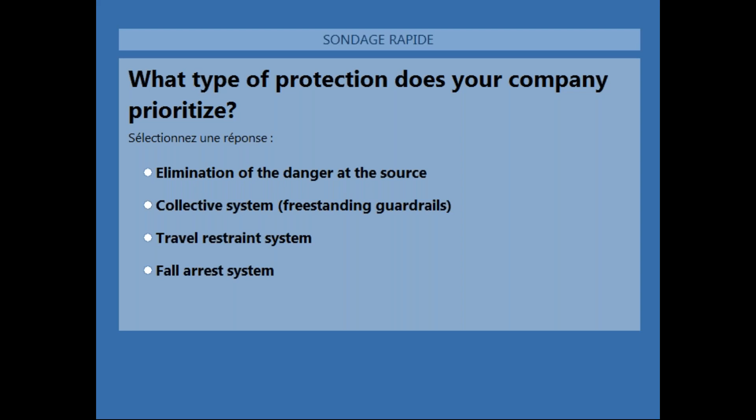Okay. So I think, yeah, a couple more seconds. Don't be shy. We just want to know who we're talking to. Like, what's your reality? What are you guys dealing with on a daily basis? I think maybe here, if I can add something before. Well, I was gonna ask something while they were answering.

I know a lot of people are gonna say we prioritize the elimination of danger at the source. Yeah, I was seeing the results on our screen, that's why I was gonna add this comment. But like I said, sometimes it's not always possible. I know that everybody's going to try to eliminate the risk at the source, but is that the reality of their enterprise? Were they able to eliminate all the dangers at the source? Is that the wish or the actual situation?

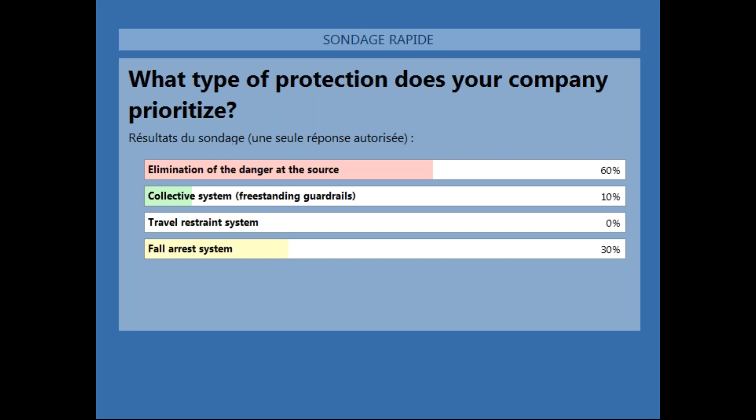Well, you can see on your screen that a third of you guys are prioritizing fall arrest systems, while a few percent are prioritizing collective systems and travel restraint systems, and as we just mentioned, the majority of you are trying to eliminate the danger at the source. Dominic, what are your thoughts? Well, I'm surprised and kind of happy that the first step is trying to remove the danger at the source.

I am noticing, however, that there's three times as many people doing fall arrest as collective systems. So I'm thinking maybe a lot of people don't know all the ins and outs and extra costs associated with fall arrest, as Francis mentioned. And maybe today we're trying to up that 10% a bit more on the collective system. Not that many people use it, so it's often a matter of not knowing how the system works.

And people have asked us to go deeper into working at heights. So that's why we created this webinar today. So that's perfect. All right. So I guess we can go back to your slide, Francis. Yeah, well, I was actually finished with that slide.

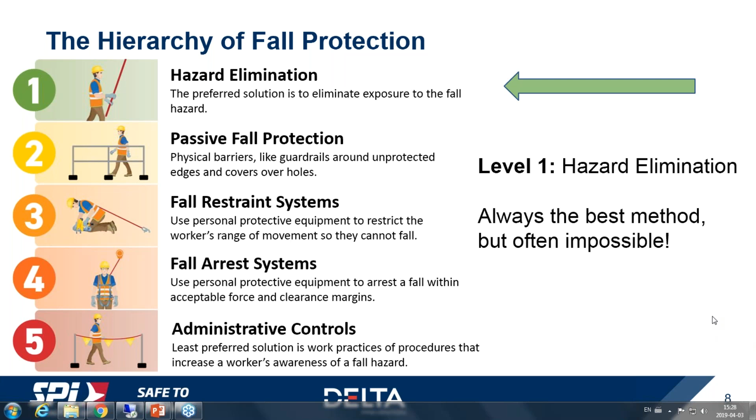Okay. So like I said, the first level, hazard elimination, should always be the first step. You should always look into trying to eliminate the danger at the source. But it's not always possible. So when that's not possible, you go to level two, which is the passive fall protection systems, the guardrail system. So when one is impossible, we should always consider two to see if it's possible. A lot of people think that number two is expensive, but when we take into consideration the long-term costs of number three and number four, sometimes they come up to be more expensive than number two.

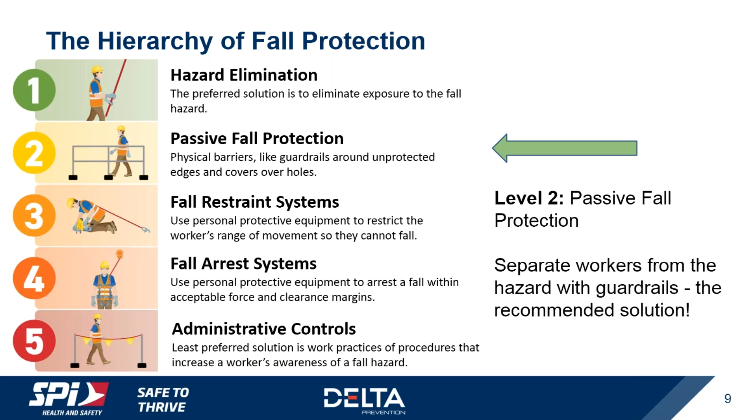Yep. We're going to ask you another question. For the 30% of people who've answered that they use travel restraint or fall arrest systems, in that case more fall arrest systems, what is your main concern? Is it your employee training or your personal training as well? Is it the engineering plan in terms of a permanent system? Is it the maintenance and compliance of your systems, or you do not use this system?

So we'll give you a few seconds again to answer. You may choose more than one answer this time, so maybe A and C, for your reality or your concern. So give you a few more seconds. Don't be shy. We want to know what are your concerns. The objective is always to answer your questions today and to make sure that when you finish this webinar, you go back to your work or your home and you say, okay, I understand now what my concerns are and how I can tackle these concerns.

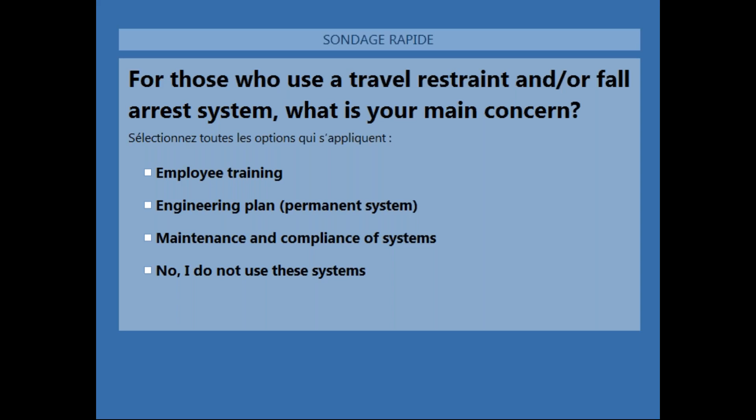Well, I'm happy to see these results because it tells us that people know that they need to train their employees to use a fall protection system. So that's a good thing. Where it's not a good thing is that they're concerned about the training of their employees, or themselves actually. They may feel they are lacking qualified training.

Okay, and the 64% for maintenance and compliance of systems, that's good too, because they know that an anchor point needs to be certified every year, and the equipment too, or the anchor point needs to be certified following the explanations of the engineer and the engineer plan of the anchor point. But usually it's around every year or every 2 or 3 years that it needs to be certified. So I'm pretty happy with these results.

Yeah, I think also the harnesses. A lot of people need training. It needs to be double checked. So I'm happy to see that's a concern because we actually want to address this later on with the freestanding guardrails and how it's meant to easily attain those compliances, those standards.

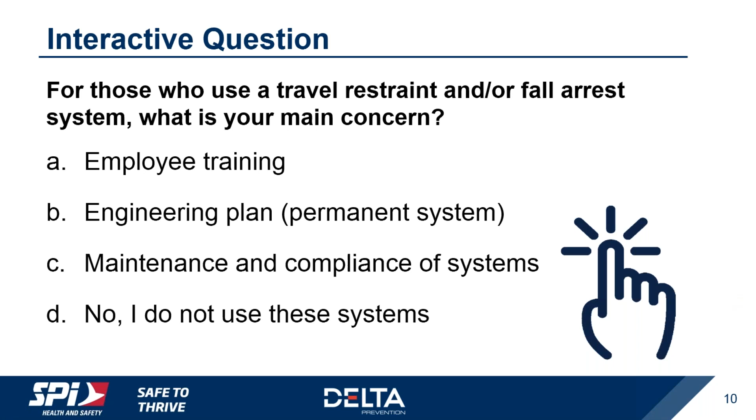Yeah, and if you don't know, one part of SPI's mandate is to offer training, but also expertise like auditing what your practices are and seeing where you may need a rescue plan or different assistance for different risks. So part of the training as well. Francis, you were a trainer advisor before. Yeah, exactly. I did audits in some enterprises that didn't know where to tie off when they were doing work at heights. They didn't know what kind of anchor point to use. They needed help with the training of their employees, so that's where SPI can help in all those fields. Good. All right, thanks for answering that question.

Now let's talk about the recommended solution. Yeah, so the recommended solution is, like we said, when we can't eliminate the danger at the source, we need to look into guardrails. And why guardrails? Well, first off, it's a collective system versus an individual protection. Using guardrails enables us to work on, let's say, a rooftop with many different workers. It's not only one person at a time that can use a guardrail. It's as many workers as you want that can use the same protection.

That's a positive point. There's no management of PPEs, so we don't need harnesses, we don't need lanyards, we don't need SRLs to work with guardrails. Like I said, it's a passive system, it's a collective system, so we don't need those types of equipment. There's no need for a prevention plan with guardrails, and it eliminates the risk of falling. It isolates the risk of falling. So these are all the positive points of guardrails. Very positive points, I would say.

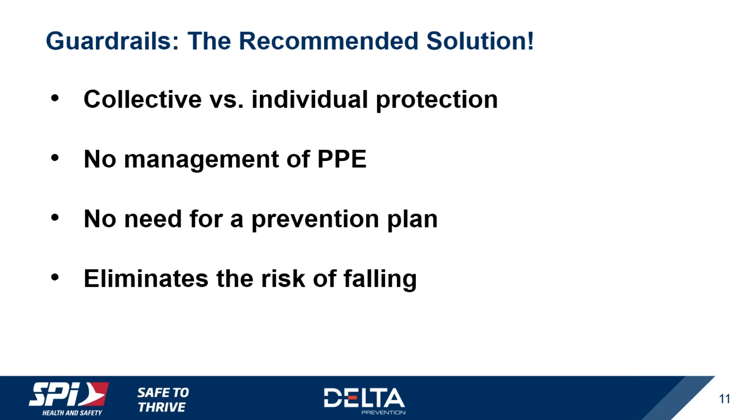And some points about the, how can I say that, the standards of the construction of the guardrail. Well, the upper railing needs to be between 900 and 1100 millimeters, so 42 inches. The middle railing just needs to be halfway, depending on the height of the upper railing, and it must be able to withstand a force of 1 kilonewton.

So if you're not used to working with kilonewtons, I'm not, it's 225 pounds, roughly. Okay, so these are the characteristics of guardrails. Something I might add, these apply to both freestanding, like Delta does, or any fixed system. So it's the same standard used by the National Building Code.

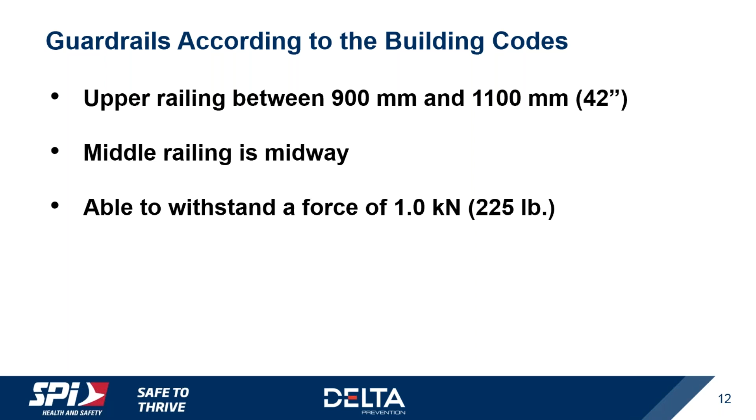We could have put, like, I drive a Subaru Outback. You drive a Porsche, I saw you, eh? No, a Mazda 3, Francis. Oh, a Mazda 3. I thought it was a Porsche.

Oh, but before, like I said, I'm full of surprises, Francis. We have another question for you. Before we get into the guardrails, we want to know what is the most important criteria for you when choosing a guardrail system? Would it be A, it has to meet the standards, B, it has to be easy to install, C, the durability of the system, or D, the aesthetic? So we'll give you a few seconds.

Oh, you guys are less shy. You've already jumped on answering the poll question. That's awesome. So we'll give you a few more seconds. All right.

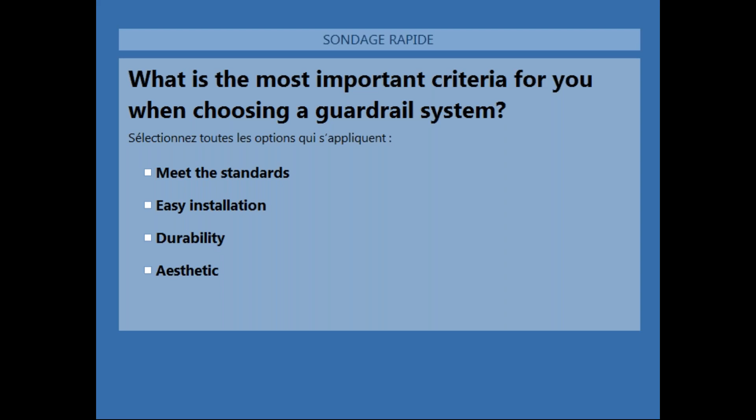Okay, perfect. So the results are on your screen. So what do we have here? 85% of you guys are concerned about meeting the standards. 46% are concerned about easy installation. 46% about the durability. Oh, nobody's concerned about the aesthetics.

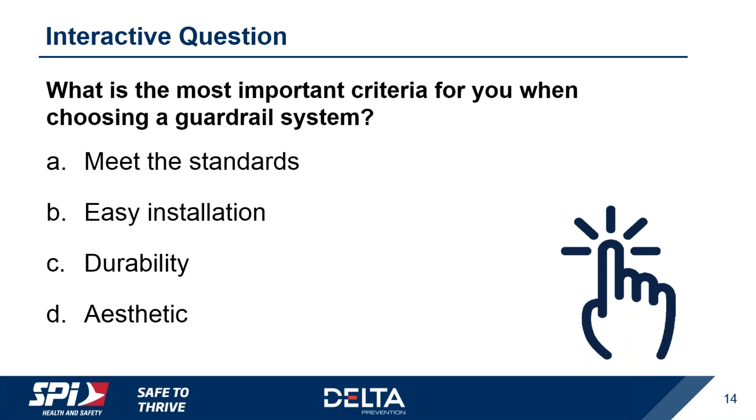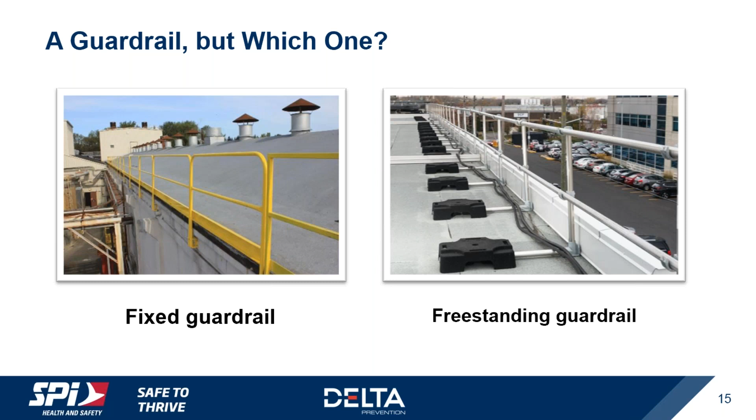And other positive points about the freestanding guardrail systems is that, well, first off, it's not anchored to the building, like I said. Fixed guardrails, yes, they are anchored to the building, so you need to drill holes in either the membrane or the structure of the building. For the fixed guardrails, you need an engineer plan. It's required. For the freestanding guardrail, no, but if ever it comes up as a question later on, Delta actually has an engineer plan that says that it responds to the specification of guardrail systems.

Fixed guardrails are not quick to install, whereas freestanding guardrails are, and fixed guardrails can't be moved or modified, whereas the Delta freestanding guardrail can be.

So if I'm modifying, for instance, my company's growing, I'm adding an extension to the building, I could definitely reuse what I already have and just complement. Yeah, it's easily adaptable, or you can add sections onto it. I mean, it's a pretty simple install and modification process for freestanding guardrails. Since it's not fixed, you don't need to unbolt it from the structure and then fill your holes and stuff. It's a non-issue for freestanding.

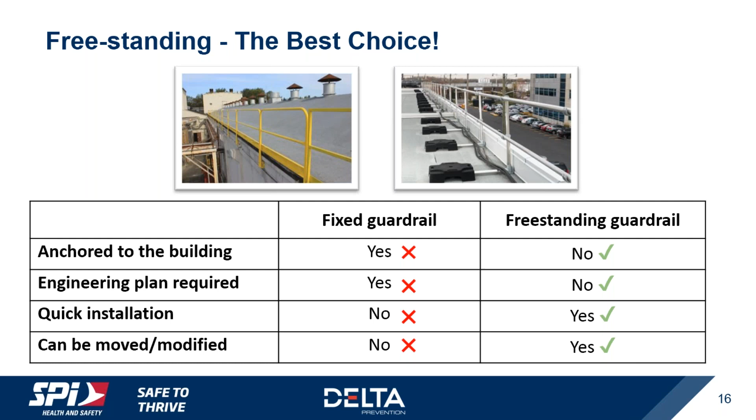And as you mentioned earlier, Francis, when you have a fixed guardrail, once it's done, you need to call the roofing company. They need to come too. Yeah, exactly. Let's say you're drilling a hole in your membrane, then you need to call a roofing company so roofers can come and fix the holes that you've just put in your roof so there's no leaks or anything.

Good. So we've talked about guardrails, but Delta, who are you guys? Who are we? We are actually a Canadian company. We are a manufacturer of permanent, non-penetrating rooftop fall protection solutions. I say permanent because it's not meant for construction. It's really meant to be permanent. It can work in that situation, but it's meant to be left on the rooftop.

You can see an example in the picture. It is those aluminum rails with those recycled rubber counterweights. That's our main system, often called ballasted systems also. So that's what we do. We manufacture this range of product. Throughout our range of product, we use unique materials. You have those black recycled rubber counterweights. They are 50 pounds each, while most of our competitors use steel, concrete, or cast iron.

What makes us different is our durability. Obviously, rubber will not crack like concrete. It will not rust, and it will not damage the membrane. It's easy to pick up and move, and easily dropped onto the rooftop. Let's say you physically drop it from a few inches or feet, it will not damage your membrane like concrete or steel would. So that's our main piece of the product.

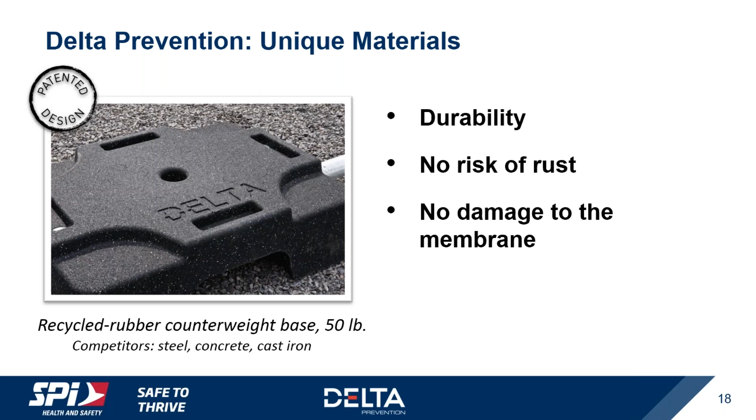The next big piece of our solution is the aluminum railing. Ours is anodized aluminum. Our competitors mostly use galvanized or painted steel. The advantage of using aluminum is it's lower weight, so it's way easier to install and move about for the employees, making a quick and easy installation, like Francis mentioned. It adds less weight to the rooftop because you do add weight for the counterweights, but whatever else you can keep light, that's just easier.

And being anodized aluminum, there is no risk of rust or discoloration, so it stays nice. People don't often mention the aesthetics. Good to know. It'll remain looking the same for years and years. That's good, yeah. And less weight on the rooftop matters with the winter we're barely getting out of, with the snow on the tops. We've seen several companies or buildings falling down. Every year we hear more about the weight on the rooftop. We need to consider it.

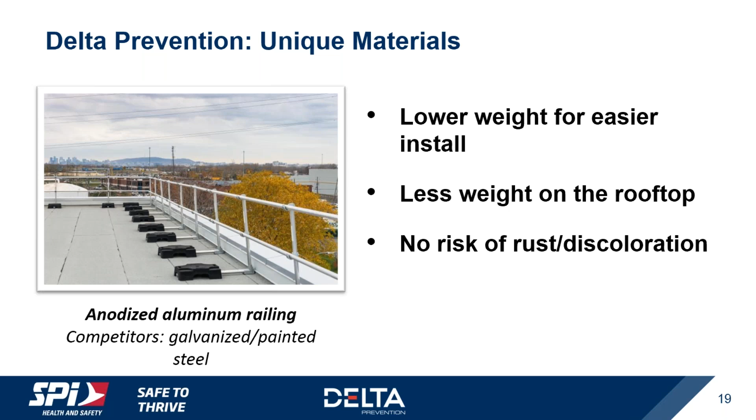And having rubber counterweights, maybe I had not mentioned, does provide all the weight and also a lot of traction. So we don't have to put as much weight because it really sticks to the membrane. So that's kind of cool. That's very good.

So why us? We are proudly Canadian, so our product is made in Canada. And we offer the best warranty in the industry, 10 years, because it matches a lot of the rooftop materials. So once it's on there, you can leave it and forget it. There's no big maintenance. You don't have to worry. You don't have to change it every couple of years. So that makes us different as well. Absolutely.

Francis, I can hear our audience asking if this system... Francis, I'm sorry. I meant Dominique. He's probably aware of it too, though. Yeah, no, but I got excited because I can definitely hear our audience asking if this system is compliant with current standards. We always hear about, is it compliant?

Is it compliant? Yeah, well, on the previous question you had asked, we know that meeting the standards is the most important thing, and I'm glad you asked because it does. And the way we can assure that it meets the different standards and is compliant is we've done pre-certification testing with an engineering firm.

So if you're doing the installation, which you should do based off our recommendation and installation guide, all the different combinations and parameters of installation have been tested out, and we have a compliance report readily available for customers so they can easily install the stuff and feel confident that it will meet the standards, both provincial and federal and even American standards.

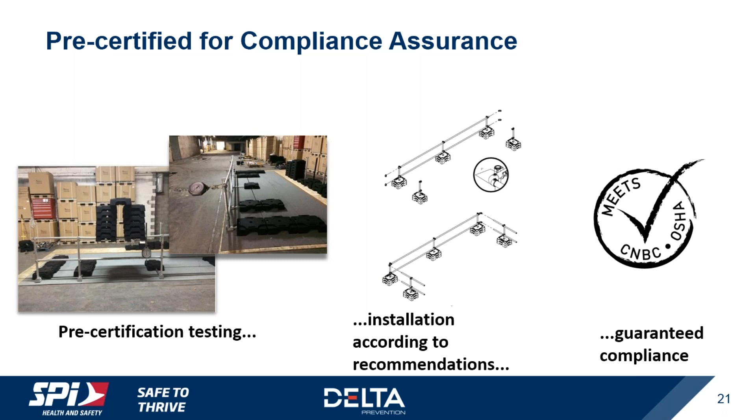Dominic, in 2019, I think we're pretty much aware that the environment is important, and that if we don't take care of it, eventually we're going to pay the price, right? Yeah, absolutely. It's one of our values, being a responsible, eco-friendly company. So we've come up with a word we call eco-lective, which is a mix of eco-friendly and collective fall protection, because in the hierarchy of protection, number two, passive, is collective. That means you're securing a workspace more than just an individual, and we're keeping that eco-friendly.

How we achieve eco-friendly: we mentioned the rubber counterweights. They are recycled from truck tires. It's all locally sourced in Canada, and even the energy, because aluminum takes a lot of energy to fabricate, is hydroelectricity, so it's clean, and we don't have to ship stuff from China or UK, wherever the competition's stuff might be.

So on the next slide, you can get an idea of the impact. Each counterweight is based off of 3 recycled truck tires. In this example of a customer, we did 2,500 linear feet, and for that one alone, we used 990 recycled tires for the counterweights. So did you say 990 tires? Yeah, that many. Okay, let me calculate. If 990 tires are used for this project, that's 55 18-wheel trucks, isn't it? Yeah, that's 55 18-wheelers worth of recycled rubber tires. So those are not going to be stuck in a landfill somewhere.

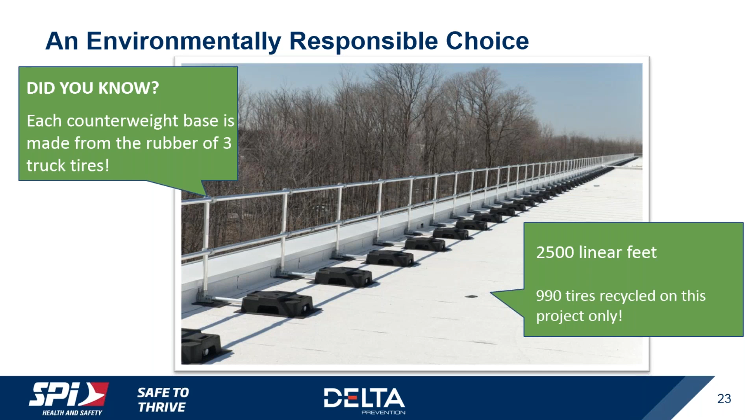So we did mention a lot of the guardrails, but we don't do just guardrails. We have a family of products within the same scope of protecting people from falling hazards. You've got guardrails that can be put next to HVAC units, next to roof ladders. We have access hatches, roof hatches, with guardrails that go around them. That's another solution we offer, because that is a risk in itself.

We have a permanent warning line, which is a complementary product to our guardrails, because often people want to have a perimeter, not necessarily where there's a fall risk, but to make sure people stay within the proper perimeter. That can be easily added to our solution, or those can even become guardrails. We can easily transition that. So that's the whole host of products. We can also protect skylights and stuff like that.

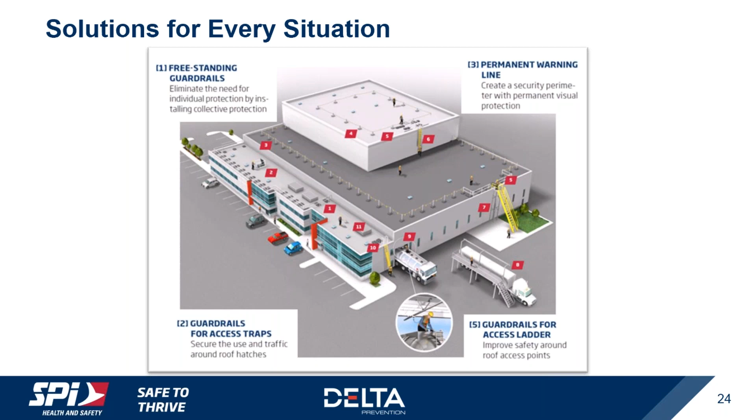Yeah, and part of our partnership with you guys is to create customized solutions. So we can see the range of solutions we could be providing. Yeah, we don't do predetermined sections. Whatever the length you need, whatever the angles, we can figure something out. Awesome.

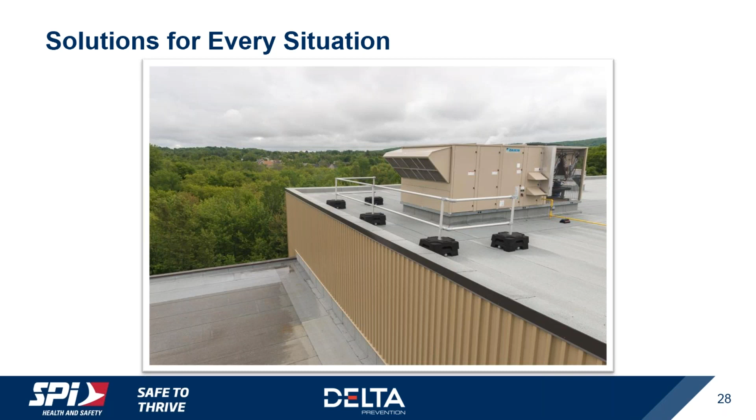So the same thing applies on the next picture, but instead of it hooking back in, we just put more counterweights at both extremities, ends of our different sections. So that's the only reason why. So on long lengths, you'll see mostly 1, 1, 1, but it'll always end in a 2, 3 counterweight system. Okay. And Catherine is asking, is there a maximum length in between the 2 sections?

Yeah, it's all in the installation guide. The previous section you showed was 120 inches, so 10 feet. This one, between the 2 and 1 counterweights and the other ones, it's 78 inches. But all of that's been done in our engineering tests, and it's in the installation guide and procedures. So when people do an installation, there's no question to be asked. It's all there, all easily adaptable. And we always include all the necessary components to make sure you have sufficient posts and counterweights to position them at the right distance and meet the standards.

Also, SPI can help with the installation, right? Absolutely. Part of the partnership is we have the skilled people to install and make sure it's compliant with the norms and standards. Yeah, actually, we have a team that does the installation of the Delta guardrails for SPI. Good. I'll let you go on with the different situations.

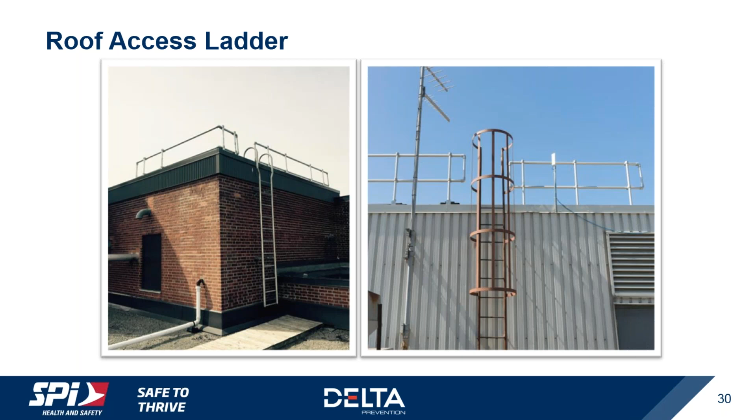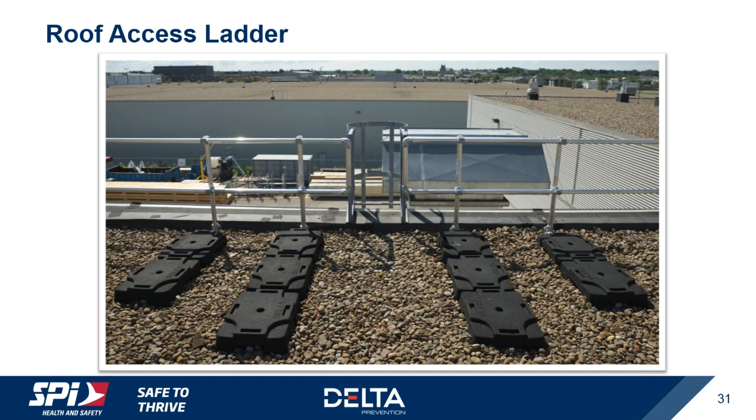Okay. So that's a picture seen on the other side. We've made it so that you have plenty of clearance once you're on that roof to walk about and not trip over our stuff. So, real common use on the picture. That's another one that I'm seeing a whole lot of.

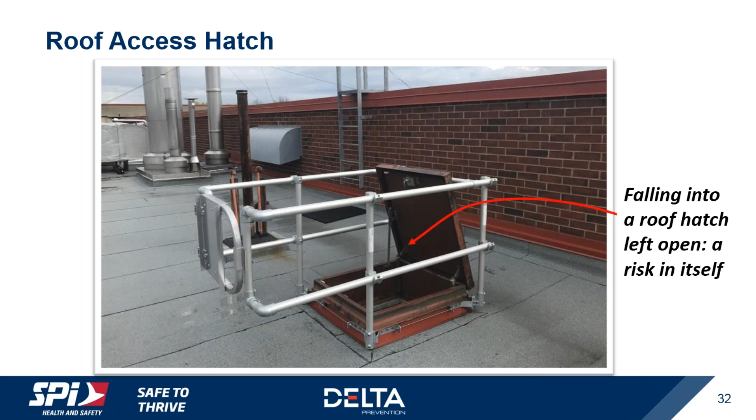So it's yet again non-penetrating, self-supporting systems. So no worries there in terms of engineering or leakage or anything, and it fits a variety of sizes. You've got one of the most common sizes there, and on the next picture, different sizes will adapt accordingly, and make sure that all these roof hatches are protected.

Before we go on to the next slide, we have a question from Dan. All installation appears to be on flat roofs. Is this product suitable for sloped roofs? We've done sloped roofs, so depending on the slope angle, we can have an adapted solution. It does require a bit more work in terms of seeing how many counterweights, but it's been done. Our most common are flat roofs, but we've done angled roofs. That's something we can absolutely do.

If we get the information from you, we can take a look at it and let you know, assess the situation and see what it could entail. Yeah, absolutely. All right.

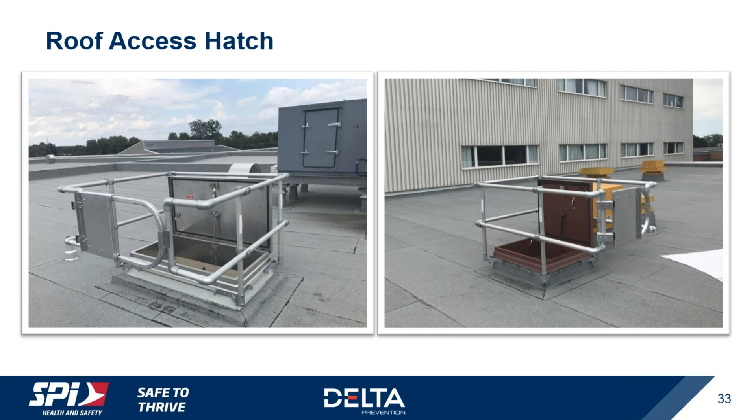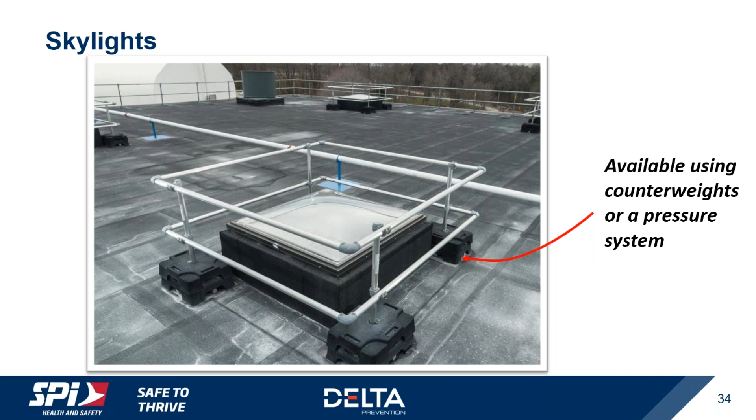So skylights, those also need protection, because obviously somebody tripping over and falling through, not a good idea. So we have a solution for that, and we can use the same pressure system you've seen on the roof hatch to clamp around a skylight when it's the right size and you've got enough space to do it. Otherwise, we've got both options there, and we can adapt to different sized skylights easily. Those are just different examples of sizes we've easily gone around.

All right, thank you, Dominic. Another question for you guys. We've showed you different situations, and we want to know which of these situations is applicable to your building. Is it the access ladder, the access hatch, the skylight, or the HVAC unit, the ventilation unit? We'll give you a few seconds. You can choose more than one answer this time. Don't be shy. It's the second to last question before we get into the warning lines. A few more seconds. All right.

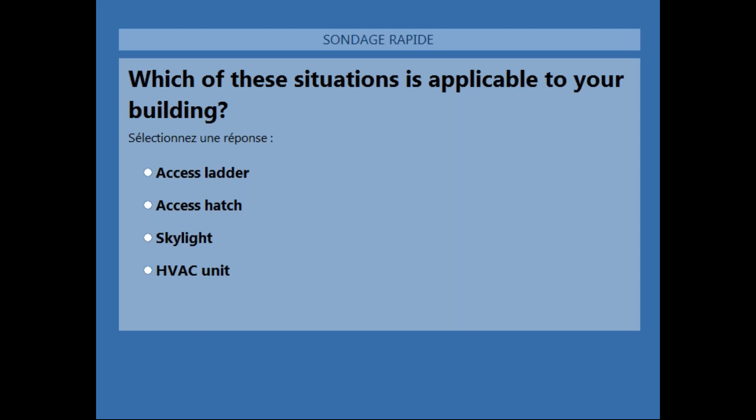So the results should have popped on your screen. 36% of the people actually have an access ladder on their building, and 45% ventilation units. A few percent for the access hatch and the skylight. I'm actually surprised that it's so little, because if they're not accessing the rooftop through a ladder or a hatch, I'm wondering how the rest of the people are accessing. It might be that they have some type of protection already around it, but most people have to have a way to reach the rooftop.

So yeah. But we do see HVAC units being one of the bigger issues, because it's not just a matter of access, it's a matter of a lot of people working there often. So that's where you want to protect. Okay. Good.

Right. So talking about warning lines. Yeah, there you go. You had mentioned it. So warning lines don't have the same requirements, but it is a good product that complements our guardrails, because we actually use the same product, but instead of aluminum railings, we're using nylon covered steel cables, and we're connecting that to existing guardrails if possible. Otherwise, we can just make warning lines by themselves. It does serve a purpose of creating proper perimeters, so people know not to go on that section of the rooftop or near the edge.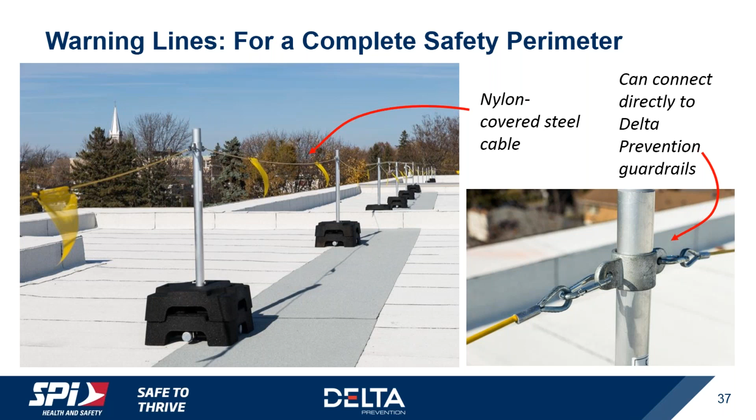And it often connects between our different guardrails. So that's a really common use of that. So that's something we do, and it's the same warranty, same product, aluminum and stuff. So it's meant to last. We can see it, I think, on your next slide. Yeah, exactly.

So this is like a really typical and safe rooftop, actually. So you have the access ladder there. We're going to protect that 10 feet. We put 10 feet there of railing because that's kind of the common size you see on our access ladder guardrails, guardrails meant for access ladders. Then you see the green line, which would be a warning line.

Then that would connect to the guardrails. So we would put the warning lines obviously 6.5 feet away from the edges, because that's common practice to keep people safe. But in this scenario, you've got a complete roof where you don't have to worry, because people coming out the roof access ladder will be securely

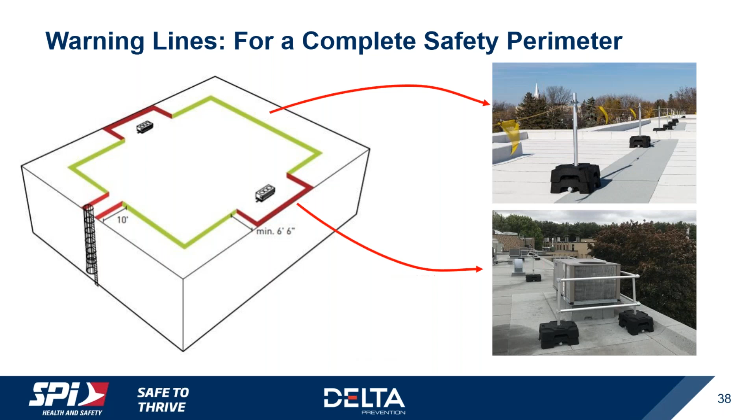safe near that ladder. Then if they want to do any type of maintenance, they'll stay within the warning line, and they'd be protected while they're working. So there's kind of a complete solution that way. Yeah, absolutely. That's what you said, a range of products. There you go. We could have put something different, like a skylight or a roof hatch. That would have worked the same way, but you get the idea. Yeah.

Our last question for you folks today. We are wondering if you've already carried out a risk analysis regarding securing your roofs. So this time you have to pick one, A, B, or C. A, no, you have not carried out a risk analysis, but would need one. B, yes, you did, but it may need to be reviewed by an expert. Or C, yes, we carried out a rooftop fall risk analysis and it's in good standing. So we'll give you a few seconds to answer.

Don't be shy, it's the last question. A few more seconds. Maybe you guys are thinking you need to get the information and ask around. But have you carried out a rooftop fall risk analysis?

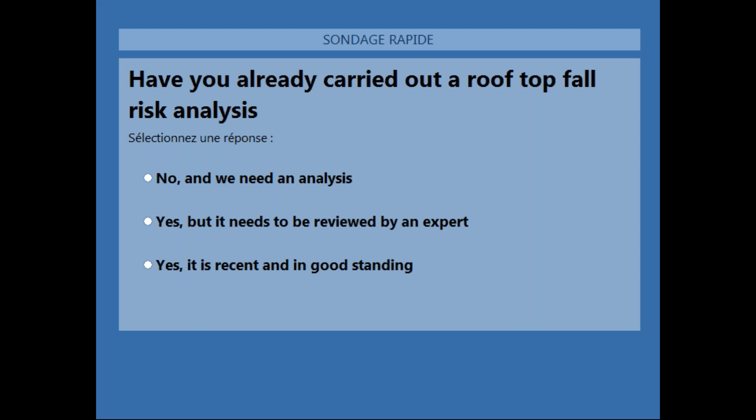All right, the results are out on your screen. So more than 50% of you have done a recent rooftop fall risk analysis, which is good, and it's in good standing, so that's interesting. And 20% of you have not, but may need an analysis, and 20% of you did one, but may need to have it reviewed. Are you surprised by these answers?

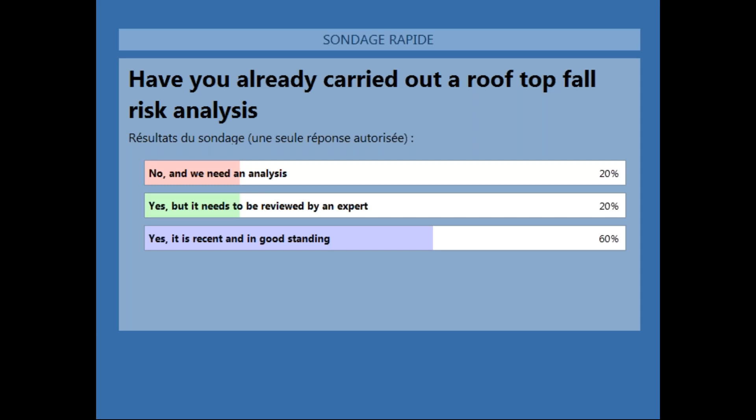Yes and no. It's really good that a lot of you have done it. That's great news because either you've secured once you've had the results, or you know what you need to secure. Either way, that's good because you can act on good information. The rest of you, I'm guessing, it might be planned. But yeah, I'm not that surprised. And it's good that people actually do it. Yeah, that's the main thing, right? We want people to be proactive. Our goal is to have people stay safe. Absolutely.

Well, from my perspective, I'm a bit surprised by the 60%. The question asks, have you already carried out a rooftop fall risk analysis? So you might have done it, but have you ever put the equipment in place to actually secure the hazardous areas that you found in your risk analysis? Because sometimes I drive around and I see a lot of buildings with HVAC systems and ladders and skylights that aren't protected. Yeah.

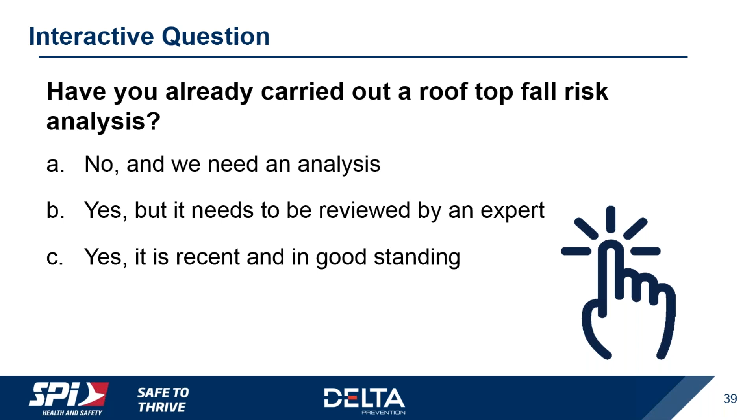So I think the number's pretty high. Yeah, but I'm glad to see it high. But then again, it's recent, so they just may not have had the time to deploy everything. Well, anyhow, I'm staying positive. I'm thinking you guys are good. Yeah, and the goal is to get home safe at night. So if you guys are protected, then I guess our mission is accomplished, right?